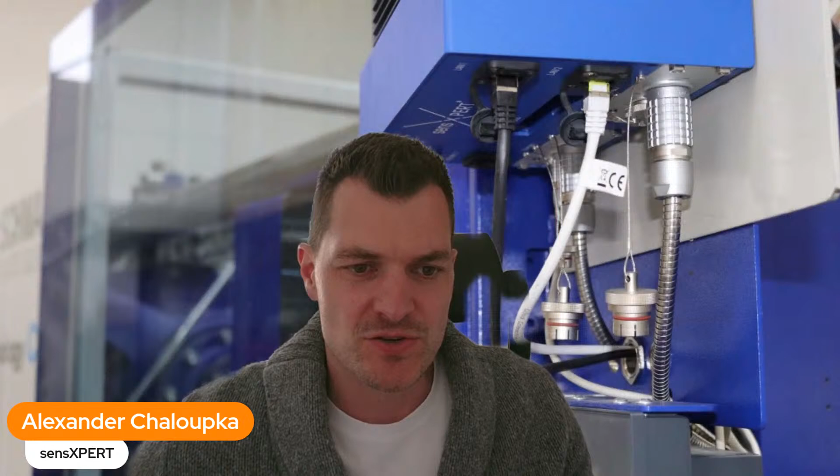Now we have two topics. Yes, I can agree, Aachen is the center for plastics manufacturing. When it comes to research in plastics manufacturing, Aachen in Europe is the #1 place to be. That is also why we decided very early, as the Netzsch Group, to join the AZL partner network. And I wouldn't restrict it to the open days. Yesterday we didn't have time to really attend, but it's the entire ecosystem the AZL Aachen has created. You have a lot of companies there looking for innovation, looking for partnerships to drive innovation, and that is the platform AZL Aachen is giving us.

Even together with the AZL Aachen, all the institutes connected from RWTH Aachen to the AZL, which is more industry focused, this is the right platform to be. Here you don't just have an open day, you have the annual meetings, you have specific group meetings where you can focus on specific applications that help drive your own business, working on specific topics in an ecosystem of different companies along the value chain very intensively.

And you have the opportunity, through AZL Aachen, and a high probability to reach the right customers out there in this tech-oriented environment we are working in, to reach the right companies and the right people while advertising new innovations we have created via AZL Aachen. So this is a very important platform for us in the interaction with the composites branch. And nevertheless, for the entire Aachen plastics environment, we are working together with the Institute for Plastics Processing in Aachen also. So that is definitely for us the #1 place to be, to support research in plastics and composites manufacturing.

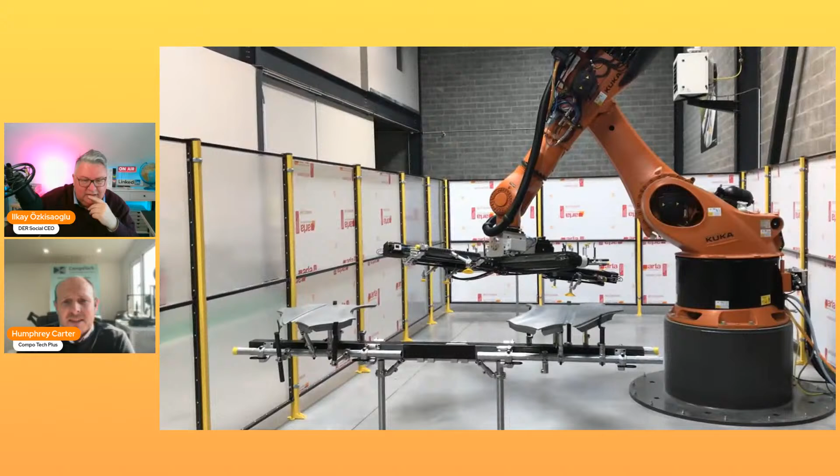And I think you might have a video which shows some of the more advanced composite automation technology that we've developed. This is actually what we call end of arm technology. So it's a part which will be fixed to a 6-axis robot, and this will be picking up body panels or sheet metal and placing it somewhere along the automation line. And this specific system is what we call a 7, 8, 9 axis.

So you've got the 6 axes of the robot, but it also has a linear axis, which is actually made from carbon fiber, and also what we call, I think the video is stalled, shift and tilt. So the outer arms of this system are moving independently, if you like. There we go. So these are all the different axes of movement that we're able to utilize within this end of arm tooling. And the idea is to have the maximum payload with the minimum amount of deflection. And also the payload of the actual robot is something that you have to consider here as well.

Oh yeah, we have another video, just showing the linear axis there, which will be basically passing one panel part from one press to the next press. And the idea is being able to do that as quick as possible, and also with as low a profile of the framework as possible, which means the press that it's passing the part to only has to open the minimal amount required. And all this is about time saving, basically. Time saving, which in the end is cost saving.

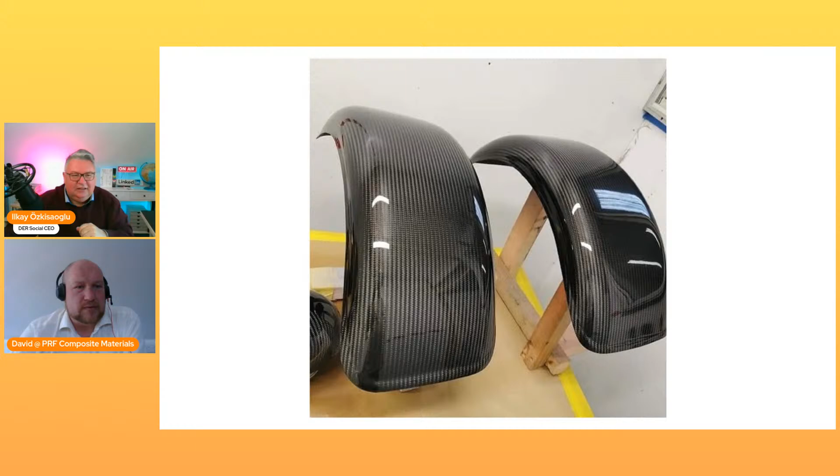Okay. So what do we see here? Those are running boards. It's not so much a classic car. So this is more the Lotus Elise. So we did some extended sills for a customer. So it had a foam core to it. That was a standard 245 sort of system yet again. And we paid a lot of attention to weave orientations and sort of the whole layup to it.

Okay. Looks really, really nice. Yeah, this is not classic. This is a new sports car. Okay. This is the Elise, right? The Lotus Elise. Correct. Okay. Good. Looks great. Sounds great. Thanks for providing us with these pictures, David.

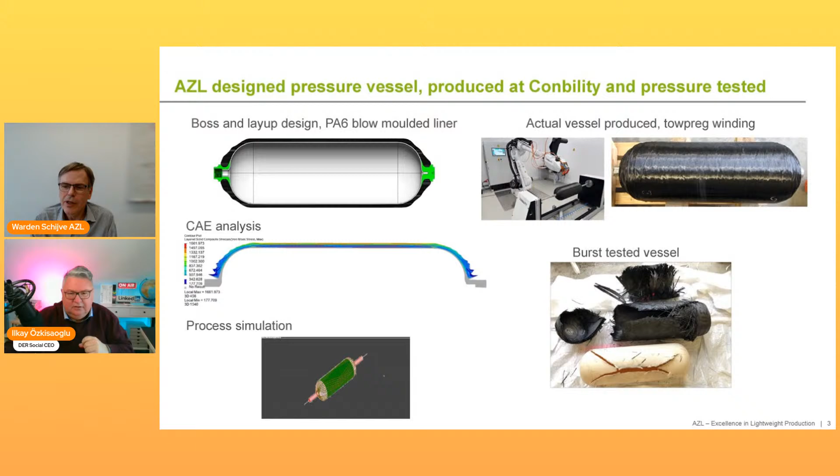I prepared everything that we do on winding technology. So I can maybe directly go to the first slide. We have been active in hydrogen pressure vessels for quite some time by now. This is the first hydrogen pressure vessel that we designed. We did it for Aramco. It was a project basically looking at how we could improve production speeds. We worked with our partner Conbility in this, looking at laser assisted tow winding, but the complete design, also including this green part, the boss parts, was done by us, and also the optimization of all the layers.

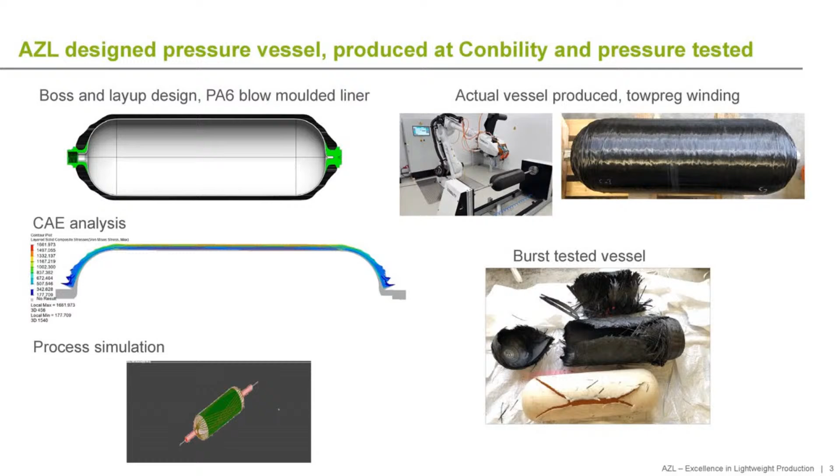And we were happy to say when the part was actually made and burst tested, that the actual burst pressure was conforming very well with our predictions, so that gave us confidence that we could develop this part. So this was really the first one that we did a number of years ago, and then we recognized, now going to the next slide, that there were a lot of questions from material suppliers, equipment suppliers, and also end customers: which materials do we have to use? What are the material properties that are needed for pressure vessels?

And then we organized a joint partner project with a lot of participants all along the value chain. And we looked at typical nominal 700 bar pressure vessels, so 350 liters or something like that, in both carbon fiber and in glass fiber. Carbon fiber is more for transport, like trucks, buses, and so on. Glass fiber could very well be used for more static applications. They would be heavier. We looked at thermosets and thermoplastics on the typical sets of material properties that are on the market today.

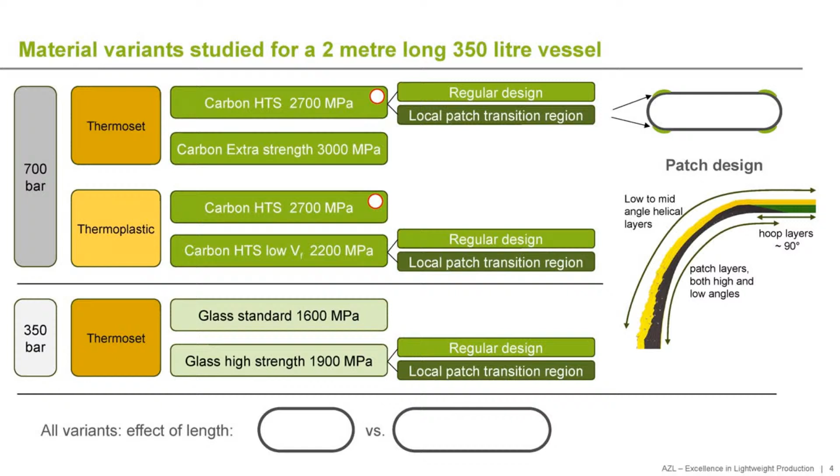All this knowledge that we have gathered in this project, if people are interested to learn more about it, they can contact AZL. We have so-called booster packages where you can, in a workshop, learn about the different materials and what they bring, and the different process methods and design options that you have in hydrogen pressure vessels. This is quite important. We also do a lot of bilateral work in this field.

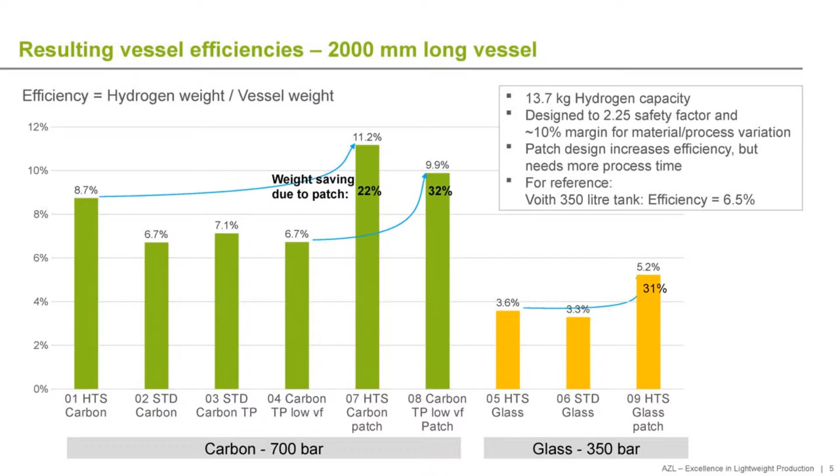Let me ask you, Warden, regarding these hydrogen pressure vessels: when do we go into serial production? Do you know when the markets will really open up for mass production, or is that still the crystal ball?

There is a lot of discussion on that. If you look at passenger cars, it's not likely to happen a lot. There are still activities for very specialized vehicles, but it's more likely that it will be for long distance trucks, where you need to take a lot of energy with you, and then it might become difficult with batteries.

And everything where weight is important. Hydrogen is not only used for transportation, it's also used in industry, and it needs to be transported. You need very special tubing for that. We also have designs for that. Of course, it's all about hydrogen permeation - it's difficult to contain the hydrogen. If you want to transport hydrogen, you still need a lot of these tanks because you need to transport kilograms, basically, of hydrogen.

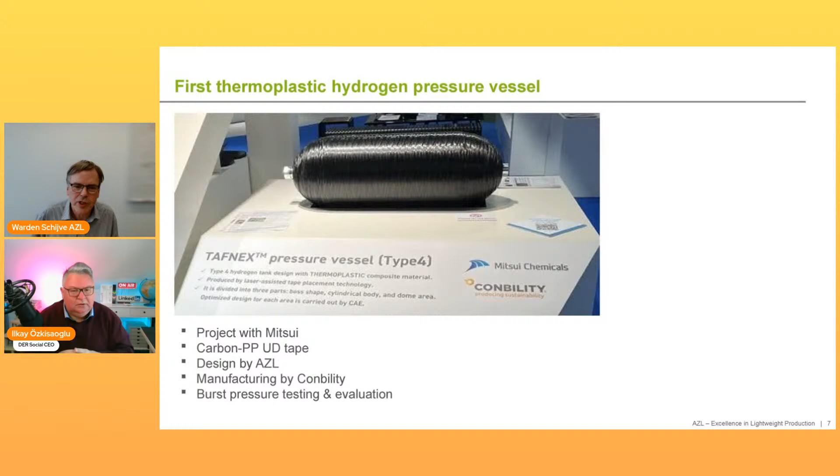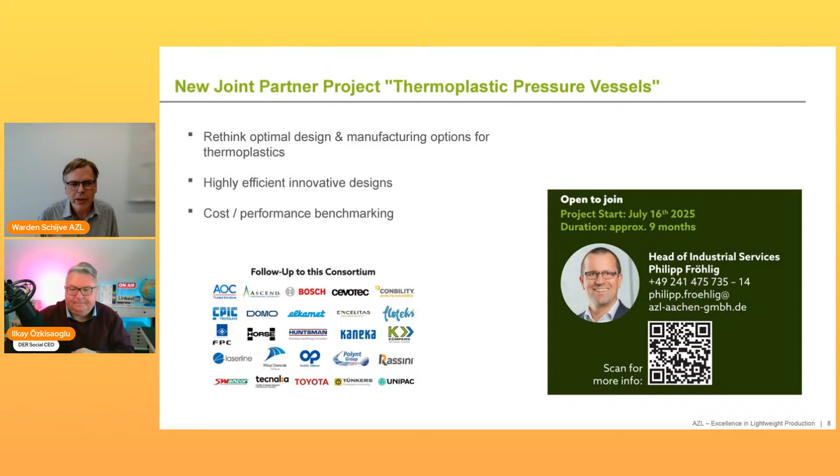We still have to look at how to make it optimum, and that's why we will start this new joint partner project about thermoplastic pressure vessels, making use of these patch designs, which is typically quite easy when you work with thermoplastic composite materials. You can make local patches much more easily because tape laying and tape winding use the same machine. There's a lot of optimization to be done, and we still have to look for competitive solutions, which we will do in the next joint partner project.

And if you are interested, of course, you can scan here the QR code, or just contact us.

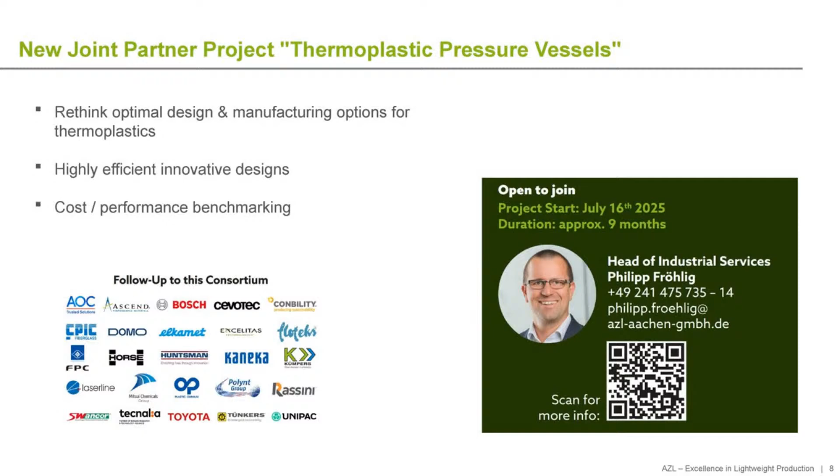That's absolutely true. So maybe I start with the Biesterfeld Group. Biesterfeld Group is a solution provider for the automotive industry, and we supply different products as a distributor. We were founded in 1906, a family-owned company, and we are divided into three business units, talking about plastic materials, plastic granulates for the automotive industry, and rubber materials or specialty chemicals for the automotive industry.

Talking about improving the acoustic performance, we have a very innovative product in our product line. It is called Kraibon, from the company Kraiburg. Kraibon is available in different grades like Kraibon Impact, Kraibon Temp, Kraibon Hybrid, and Kraibon Damp. This last version, Kraibon Damp, is used for sound dampening, mainly for structure-borne sound dampening.

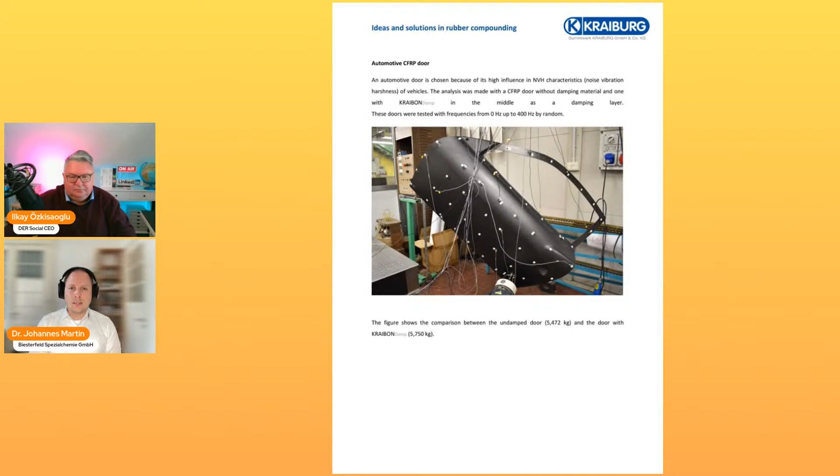I have brought with me one presentation where you see a carbon door, which was tested together with the company Beyond and Kraiburg. You see here a carbon door with a weight of 5.472 kilograms, the undamped door, and just by adding a little bit of weight, the damped door has a weight of 5.75 kilograms. You can have some very good sound properties.

Yes, you need to increase the weight a little bit, but compared to traditional methods like aluminum butyl or very heavy acoustic foils, which could have a weight of up to, I don't know, 4 kilograms per square meter, we are talking here about a fraction of the weight compared to traditional methods. This was a test where we measured the frequency between 0 hertz and 400 hertz.

If you go to the next slide, Ilkay, you see the amplitude of this damped door, and you clearly see that there is immediately better acoustic improvement over the full range of frequencies, and in particular in the audible range for humans. At a frequency of I think 60 hertz, we were able to reduce the sound amplitude by about 25 decibels.

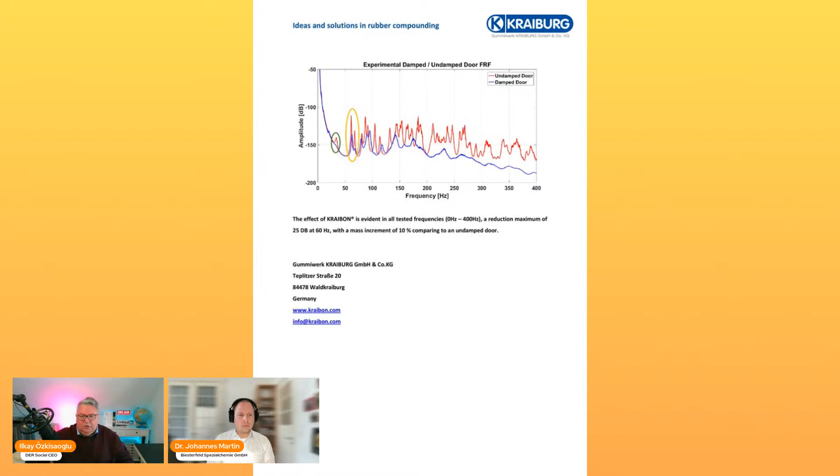Okay, wonderful. But I think I've jumped over two other slides. No, we do not need to show them. This is only, let's say, a summary of the full setup, which materials were used, which setup we had in this experiment — a standard test report. I think here the community is more or less just waiting for the results. Absolutely right, you smashed it.

Okay good, Johannes, so community, if you want to see that sound dampening effect during JEC World — maybe I continue — during JEC World I had the pleasure of an interview together with Ilkay, and we showcased both doors with a drumstick where we were able to show the community the difference, because talking about a sound dampening effect is worthless if you can't really imagine it. You could clearly hear a huge difference between the undamped door and the damped door, and in this video from Ilkay we recorded both sounds. If you're interested in the sound of this door and its performance, please go to this video. I think you can find it in Ilkay's feed on LinkedIn, so you get a real life impression of the sound dampening effect.

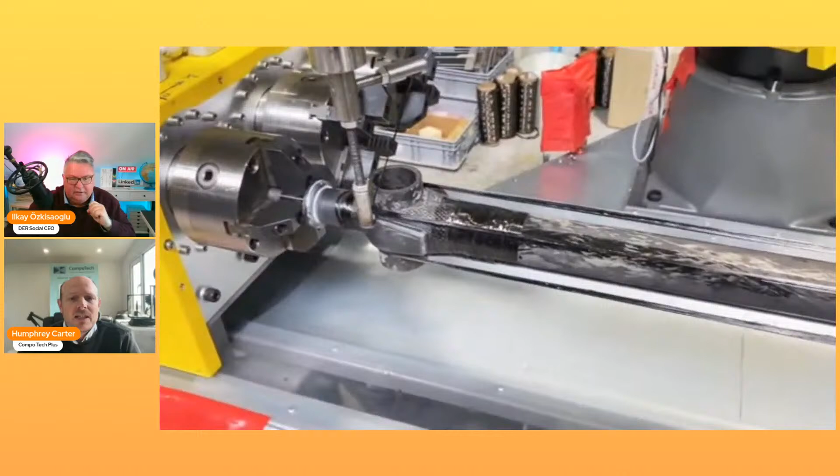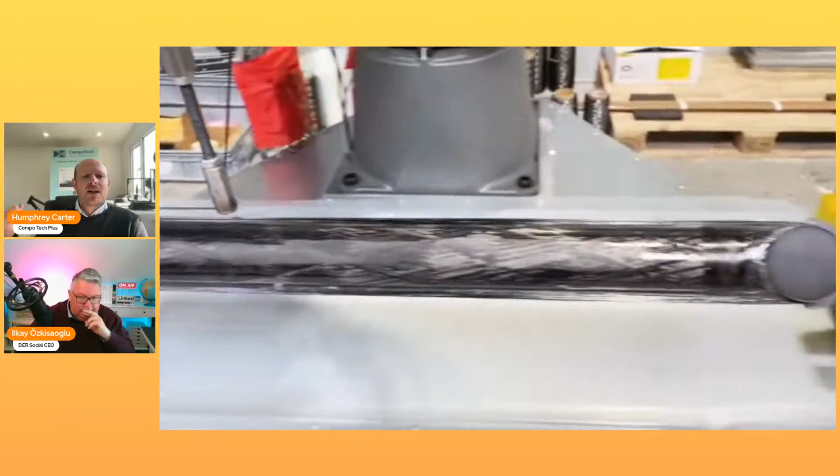So this is showing the technology, how we're winding continuous fiber around the connecting parts on a strut. This is the bicycle you mentioned before, but it can be applied to any kind of connecting component, and we've used it in the automotive sector as well. Behind me you can see the finalized frame, how it looks in its final form in this connection. So we have the loop fibers here connecting to, in this case, a head tube for a bicycle. But we've done linkages and struts within automotive, though this is more one-off motorsport applications.

And of course, winding fiber lends itself more to straight structures, straight profiles, rather than flat body panels. That is where our technology is and where the company Compotech is using its know-how and knowledge into the automotive sector.

What is the challenge with 6-axis? Well, the technical side is obviously the coding of the robot and combining a design for a laminate into a functional fiber placement with the 6-axis, and being able to code that.

We have a program which we can take a laminate design, or let's say a fiber winding design, and input those based on parametric components of the tooling. So we will have the design of the tooling, the diameter of the tube, and the length of the tube, and we can input that directly into the winding software, and that automatically will transfer that to the robot to wind what we've designed as a theoretical laminate.

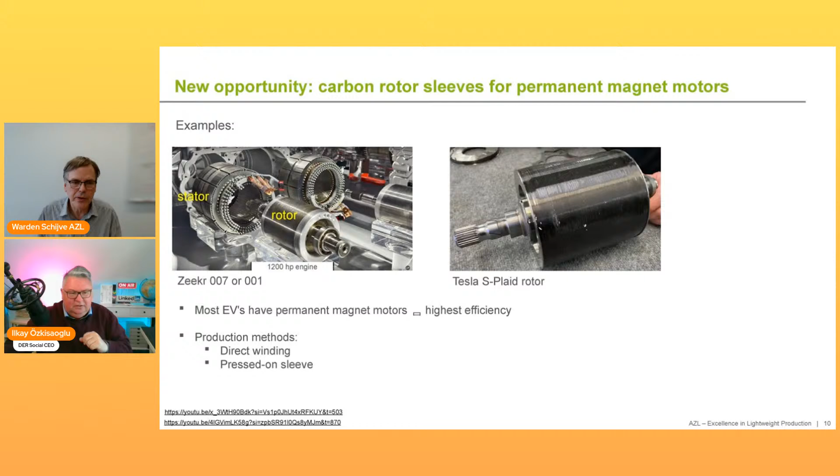If you look at electrical motors for electrical vehicles, they typically have a rotor and a stator. The rotor is the rotating axis, and the stator has a lot of copper windings internally to make alternating magnetic fields. Now, the rotor, to have maximum efficiency and maximum range of the vehicle, uses permanent magnets. And then people have found that at high rotation speeds, it's advantageous to contain these magnets with non-magnetic materials, and carbon fiber composite is very suitable for that.

And here you see some examples. The left example is from a Chinese vehicle - it's huge, you see the amount of horsepower, it's not normal, I would say very high power. The Tesla S-Plaid, of course, is also a premium high power vehicle. But basically it's all about efficiency and maximum power.

How these rotor sleeves are made - there are basically two variants. You can wind it separately and then push it onto the rotor to contain the magnets, called the pressed-on sleeve. But you can also directly wind on the magnets. That's of course easier, you have maybe better control on the tension, because you need some pre-tension there.

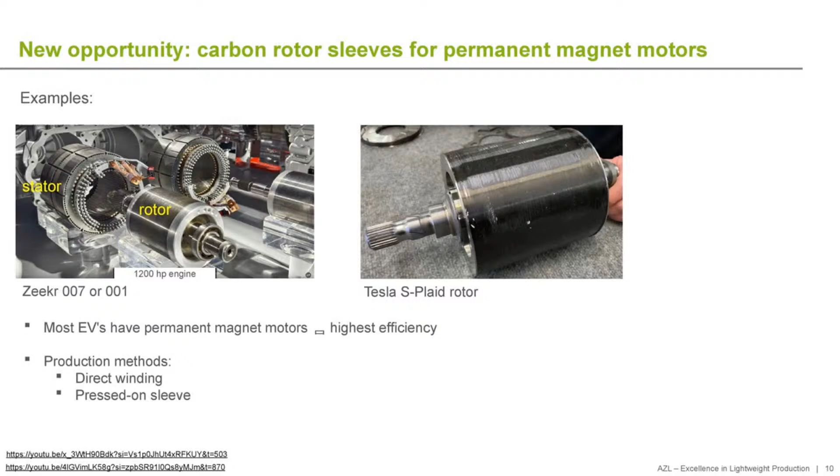Currently we are running a joint partner project, again looking at all these different materials - just on the left to see what we're talking about. Carbon sleeves are typically very thin, maybe just 1 or 2 millimeters, or maybe 3 millimeters, and they contain the permanent magnets. When running at very high speeds, the magnets want to go outwards, and you have to contain them. The alternative material that's non-magnetic is say corrosion-resistant steel, Inconel in this case.

But there are some disadvantages to that. When these motors run at high speeds, they also get quite warm, and then it's of advantage to have carbon fiber because it has a very low CTE, so it keeps the magnets much more together. And typically you also want a very narrow gap between the stator and the rotor, because that's best for efficiency. Also why carbon fiber? Because the eddy currents, due to the alternating magnetic fields, are lower, meaning also lower losses.

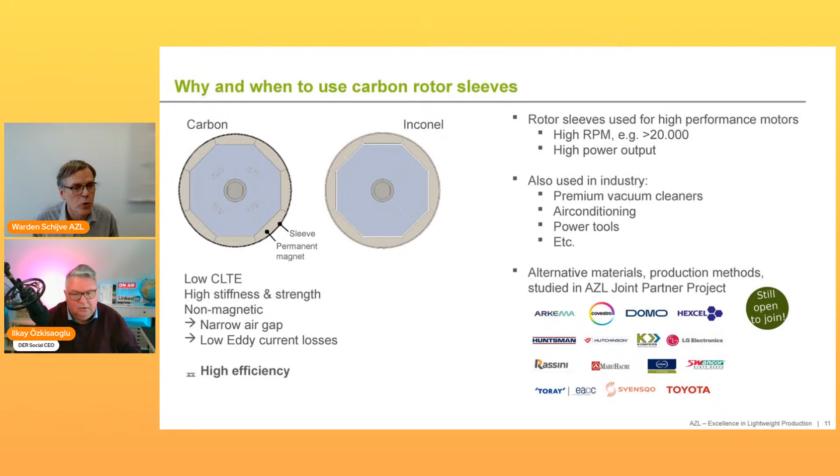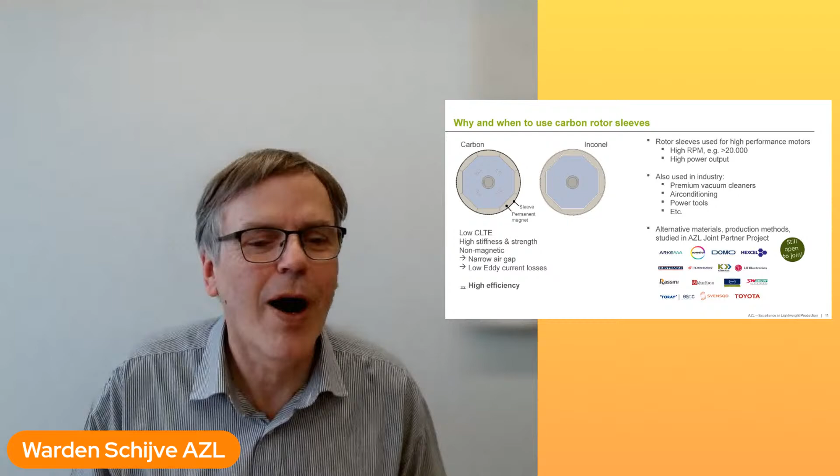It's difficult to see here on the screen perhaps, but the blue one is Schunk - they already produce rotor sleeves today. And also Toyota is there, they also want to learn for their electric motors. So we see this as an upcoming application, and it's the same winding technique, but on a different scale as we have seen for the pressure vessels.

So yeah, now I'm curious - have you been on the German Autobahn, and what was your maximum speed, Warden? Well, be honest.

No, honestly I think below 200. Sometimes I remember you coming home late from the airport, after midnight when the road is empty. Then you want to get home early, but it doesn't happen that often, especially today. If you drive in daytime, it's not possible. Not where you're living here. No.

No, I'm just kidding, because everyone thinks he can speed in Germany, but in reality the motorways are so congested, so full, that you cannot speed anymore. There's a natural brake available.

Can you explain in two short sentences what a joint partner project is for those who don't know? The idea behind a joint partner project is basically: we gather what is of interest to more companies in our workshop meetings that we regularly have at AZL, or at the annual partner meeting, and in individual talks. We notice there's a lot of interest for a certain topic, and we see what is the most often posed question. The questions are mostly about how our materials, machines, or processes compare to other options that are out there.

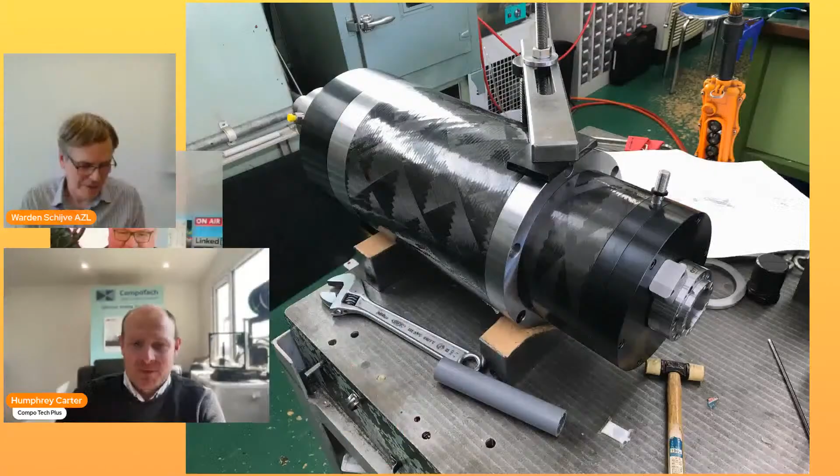Humphrey, go on. Very interesting discussion that Warden had, and perhaps to follow up — the picture I was sharing via the portal is of a spindle motor that we use for machine tools, coming back to the rotors. We use this quite often, and perhaps, Warden, that's a discussion we can have after this, with your discussion group.

In the spindle motor sector for milling tools, we find that we can get a lighter weight milling spindle, but there's also a cost element here, because machining the high quality internal surface of that cover tube is actually a very expensive process. Being able to wind a high quality tooling and reproduce that multiple times is actually a cheaper solution for some of these rotor covers. So you get the double benefit of it being cost effective as well as lightweight.

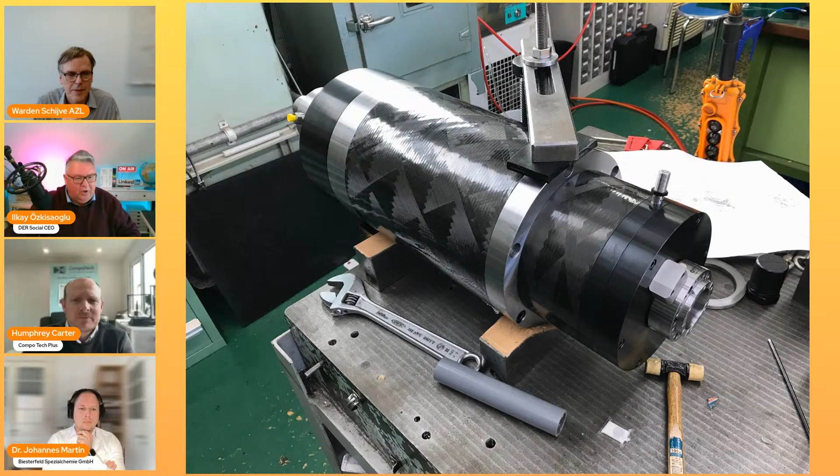Johannes is muted. I think now it happened to me. Okay, now, yeah, we talked.

Yeah. Now we talked about that OEMs have the challenge to reduce the weight of lightweight parts, and we all know that composite parts often have a poor damage tolerance compared to metals or other materials. Kraibon Impact could be integrated in the composite part, and it results in the composite part getting more elasticity perpendicular to the fiber plane, resulting in almost ductile behavior.

So you see here in the upper pictures an F1 nose in a crash test without Kraibon. Those videos are available on YouTube, and you see the full nose is completely destroyed with hundreds of splinters. And in the video below, you see that it is not destroyed. Of course, it is destroyed, but not in the same way like you see it above.

If you see the video, you will immediately see the difference, that there is a ductile crash behavior, so that the impact energy is not 100% forwarded to the structure. And we all know, of course, the stone impact on the windshield, and there also Kraibon Impact offers some good properties. If you go to the next slide, you see some.

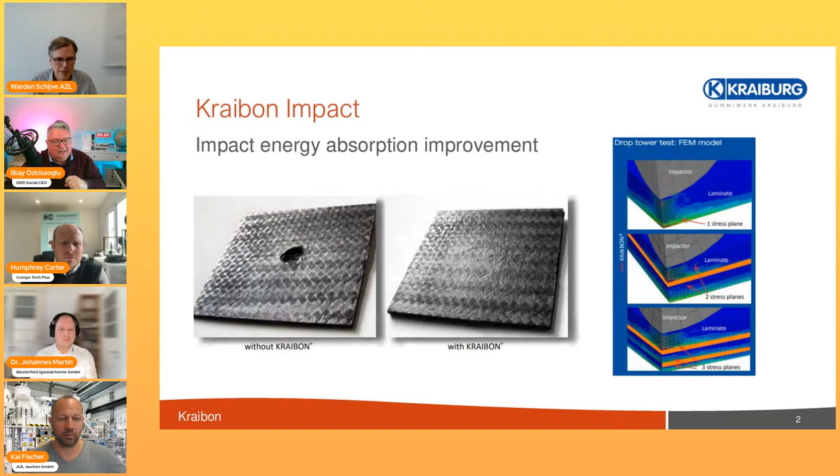I think both have their dedicated options. As Warden said, it's important that the logistics and the business models for that are also implemented. From a technological point of view, things are very mature today. But it's a logistical topic, and the business models should also be capable, so that it's competitive and people can make money out of the logistics.

Mm-hmm. Yeah. And it's also a very nice example. It's a very impressive combination to combine the elastomer together with the composite, and this is also a very good example for the composite industry, that you always have these development cycles of technologies which have been there in the past. I very well remember when we at IKD applied this technology for sideboards in aerospace to optimize the acoustics.

There's also a nice PhD thesis by Dr. Tobias Preuss from that time, where he integrated these elastomeric interlayers into honeycomb structures. So new drivers are coming from the industry, and then all these technologies find new ways for application.